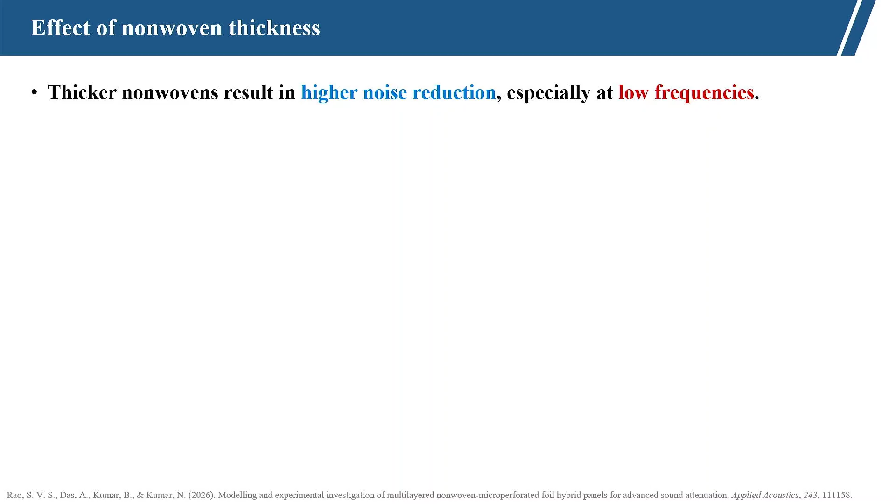So, now we are using nonwoven for protecting from noise pollution. In the last session, we discussed the effect of nonwoven thickness on noise reduction. As the thickness increases, the sound absorption coefficient also increases, and also the noise reduction coefficient.

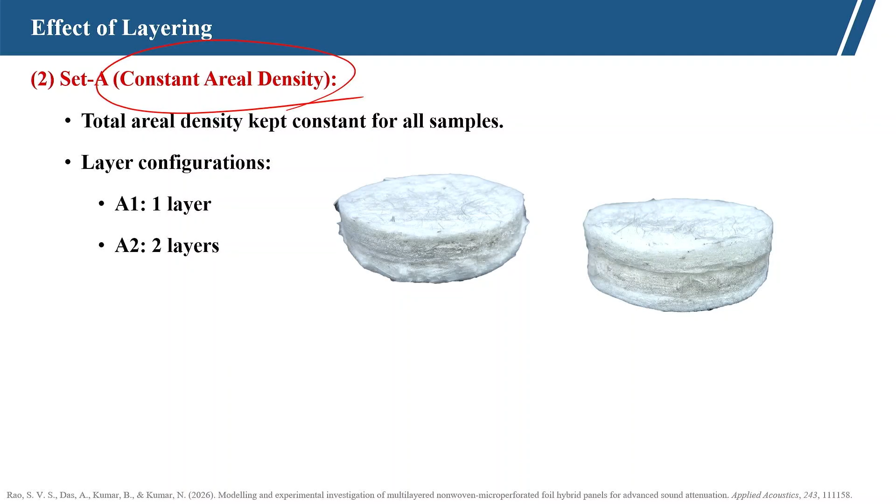Then we discussed a different layering process: 1 layer, 2 layers, 3 layers, 4 layers, 6 layers and 8 layers, keeping the overall thickness constant, and also for different layers where we try to keep the areal density constant. That effect of layering we discussed in the last session.

With the increase in layering, we found that the stacking of different layers increases the sound absorption coefficient. That may be due to the cavity created, where multiple reflection or diffraction is there. These reasons affect the sound absorption.

When sound enters a cavity, it goes through multiple reflection and that decreases the sound energy. On a rough surface, scattering takes place, which disturbs the sound propagation. So, that also helps in sound absorption.

The repeated variations in the material density result in viscous loss, like here the dense material, and then no material in between, the air cavity. So, in the multi-layer, sound comes from this fabric, then the air cavity, and again enters into the nonwoven fabric.

That repeated change in the material results in viscous loss, and this happens more in the case of 8 layers. There are 8 changes in the material density, so that affects the viscous loss.

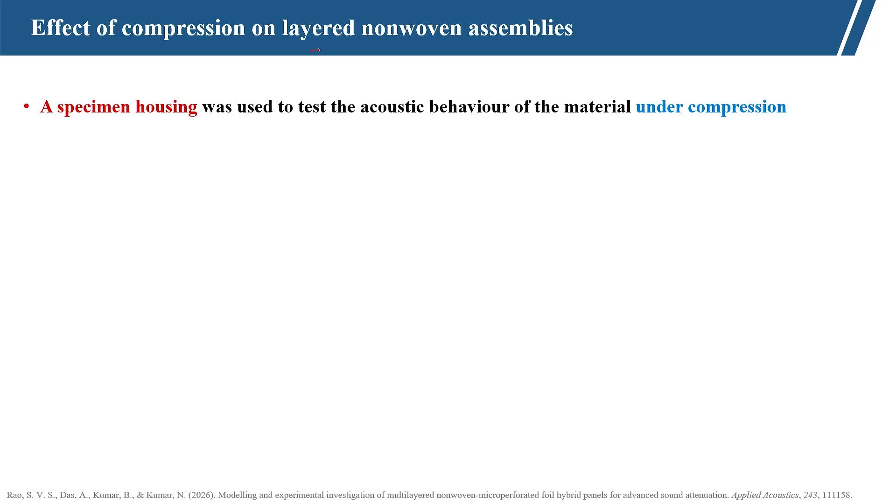Now, we will discuss the effect of compression on layered nonwoven assemblies. We have fabricated a system where the thickness can be changed in a controlled manner. It is not a compression test; we have not put any compressive load, because there the thickness cannot be controlled. With this system, we have controlled the thickness.

There is a screw system. By rotating the screw, we can compress the nonwoven fabric to a certain extent. If we keep the initial total thickness at 40 millimeters, 4 centimeters, and the pitch of the thread is 4 millimeters, then after one complete rotation there will be 4 millimeters of compression, effectively 10% compression. So, by rotating this thread we can compress the material in a controlled fashion.

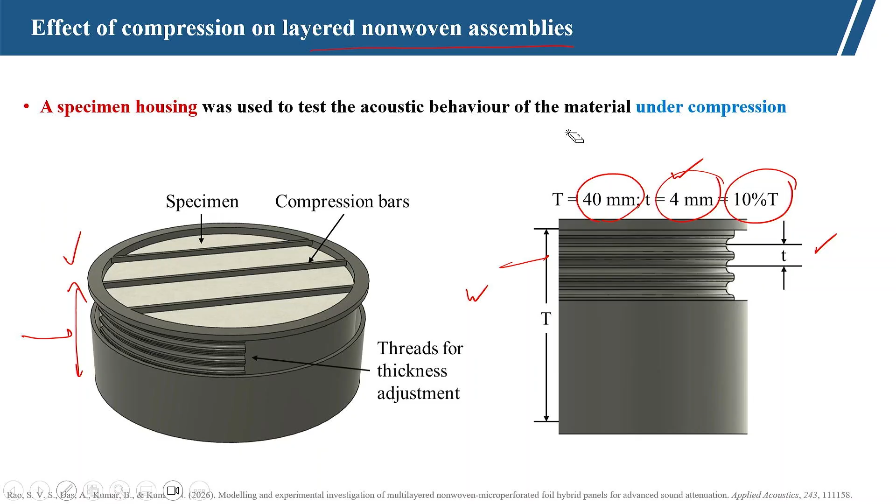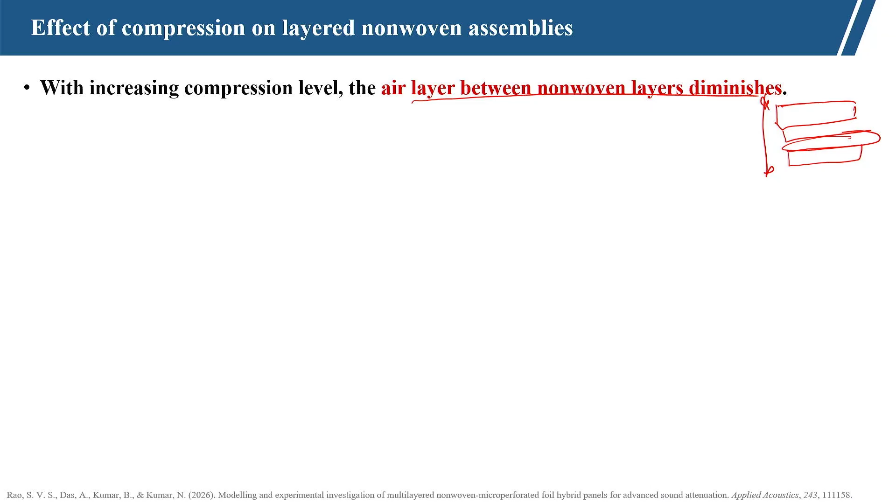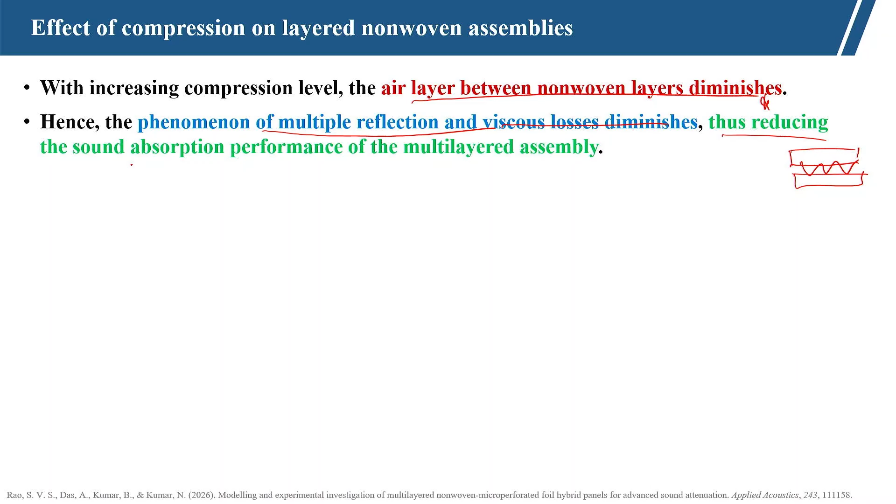With the increase in compression level, the air layer between the nonwoven layers diminishes, because we have used this multi-layer. And the phenomena of multiple reflection and viscous loss also diminish, because the gap between the layers is reducing. The multiple reflection and viscous losses seen in the last study reduce, thus reducing the sound absorption performance of the multi-layer assembly.

In the uncompressed state, the sound absorption coefficient or noise reduction coefficient is maximum, but at 40% compression level, the sound absorption coefficient is minimum. In the multi-layer, the air cavity between layers reduces, and even within a layer the pores and air content reduce.

Next, we prepared a microperforated film. We took a film and created micropores on it, and we observed that the addition of the microperforated film increases the noise reduction coefficient. So, normal film, microperforated film, and normal nonwoven.

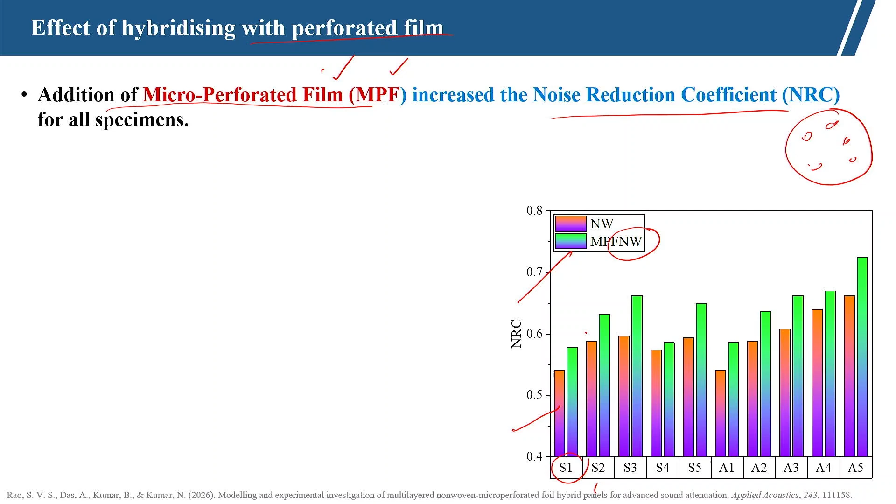The normal nonwoven is S1 and A1; we used the same fabric layers as in our earlier study. S1 is a single nonwoven, one layer, then two layers like that, and with the incorporation of micro-perforated film with the nonwoven, we found the noise reduction coefficient increases.

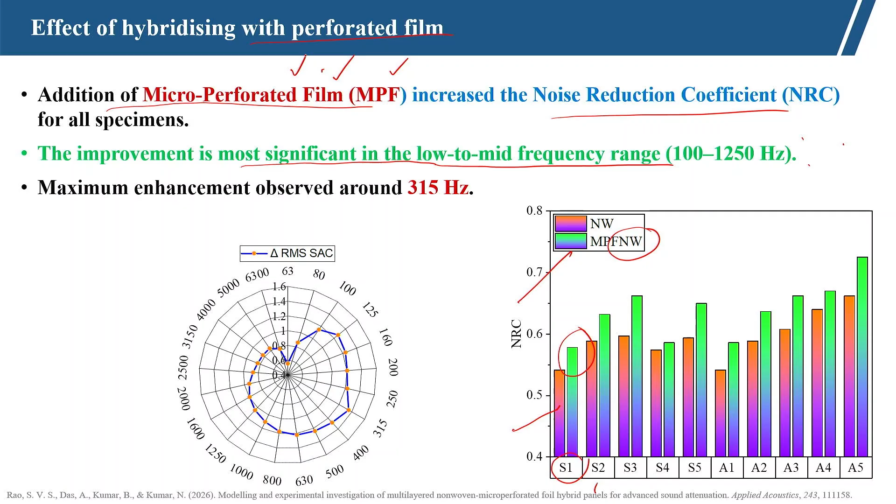The maximum noise reduction coefficient is found around 315 hertz. So, in the low to medium frequency range, the noise reduction coefficient was observed to be highest by incorporating the micro-perforated film along with the nonwoven.

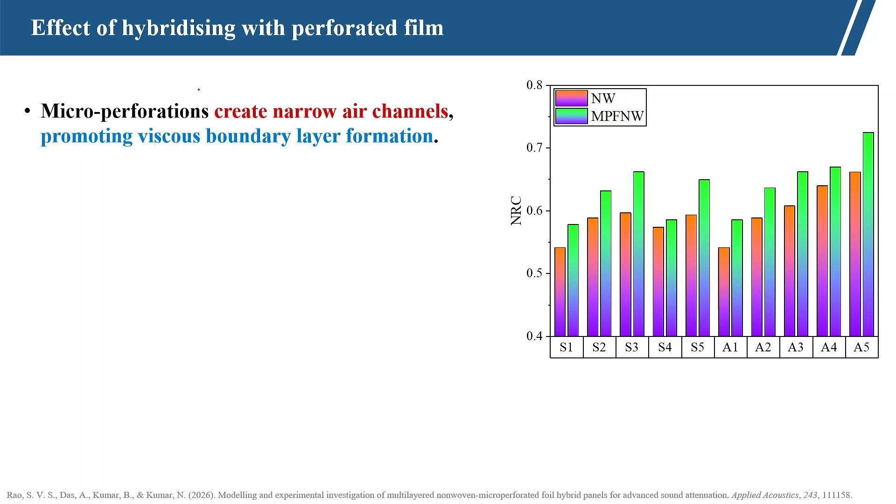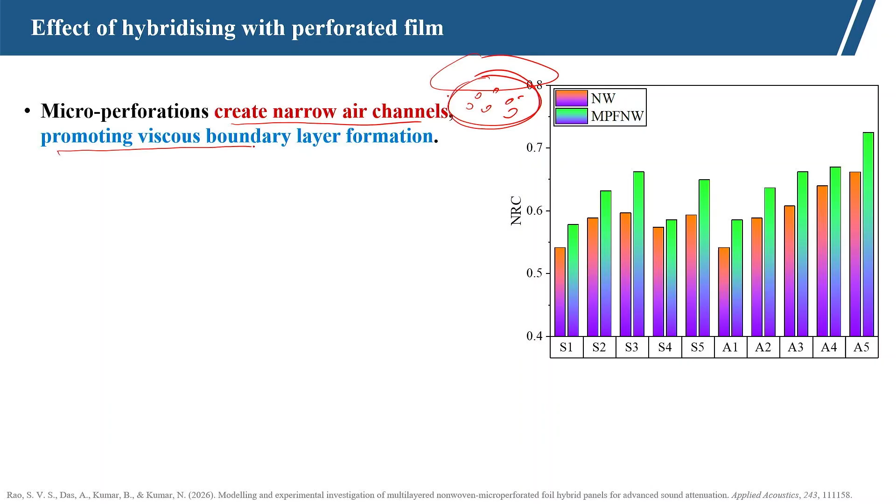So, what happens when we incorporate the microperforated film is that it creates narrow air channels. The nonwoven is there, and after that a narrow air channel will be there, which promotes viscous boundary layer formation, and this leads to greater friction between the fiber or any solid material and air, so the frictional dissipation of acoustic energy will be more.

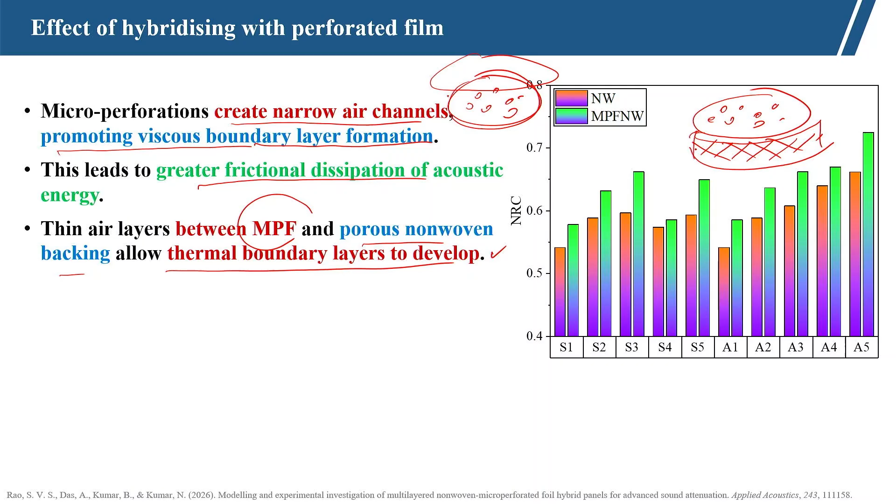The air layer between the microperforated film and porous nonwoven allows a thermal boundary layer to develop. When the microperforated film and the nonwoven are sandwiched, a thin air layer is formed between them, which allows the thermal boundary layer to develop, and the combined viscous and thermal effect enhances the overall sound energy absorption.

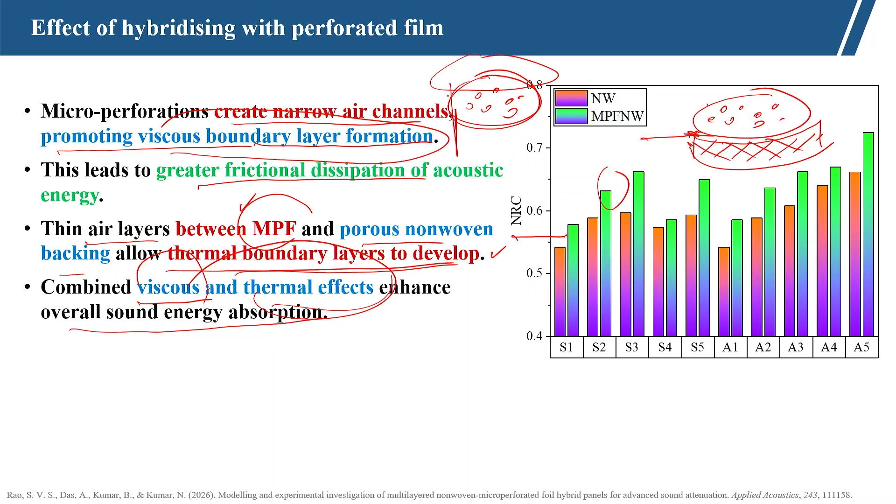So, first the narrow channel creates the viscous layer. Due to the narrow channel, a viscous boundary layer will be formed, and in between there is an air cavity that results in the thermal boundary. Both combined ultimately result in a higher noise reduction coefficient.

The positioning of the microperforated film within the multi-layered structure and the number of microperforated film layers also affect the acoustic behavior. We have seen that incorporating one microperforated film with the nonwoven enhances the noise reduction coefficient, but positioning also affects it significantly. The positioning is of different types. In N1, only one microperforated film is placed; here 8 layers of nonwoven are taken with only a single layer of microperforated film.

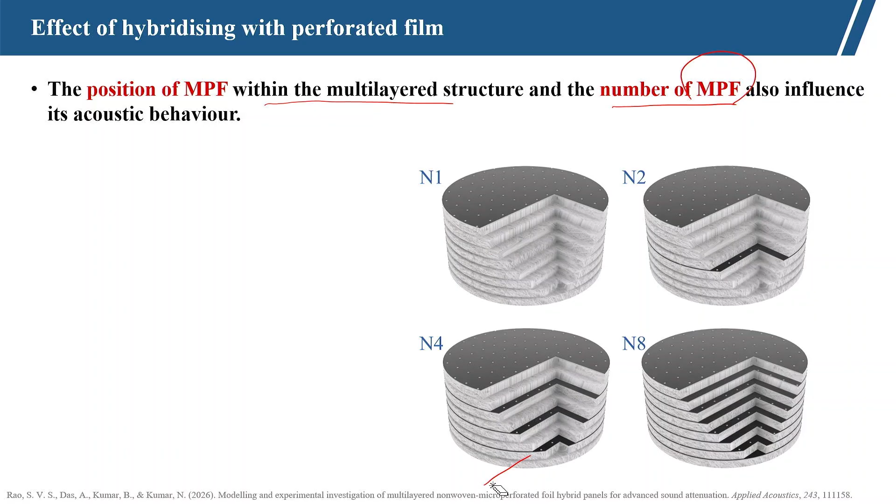In N2 we have kept 2 microperforated films, one at the top and another after the 4th layer. In N4 there are 4, incorporated after every 2 layers, and in N8 we put one alternately after every nonwoven layer. So the number of microperforated films is increasing, and it affects the noise reduction coefficient.

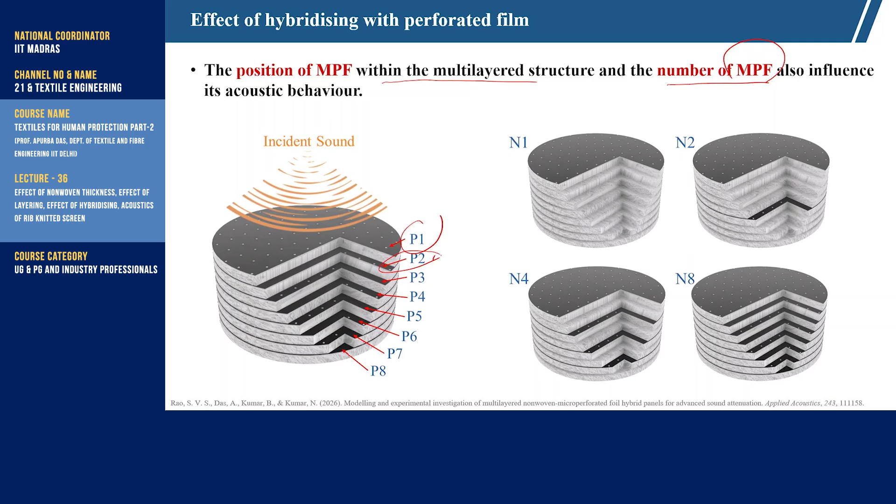Now, incident sound is there. If you see N4, P1, P2, P3, P4 are the perforated films, and when sound is incident, there will be viscous loss and a thermal boundary will be created. In this case we have placed a single layer of microperforated film: P1 when we keep it at the top, P2 a single layer after one layer of nonwoven, and similarly in this way we place the microperforated film.

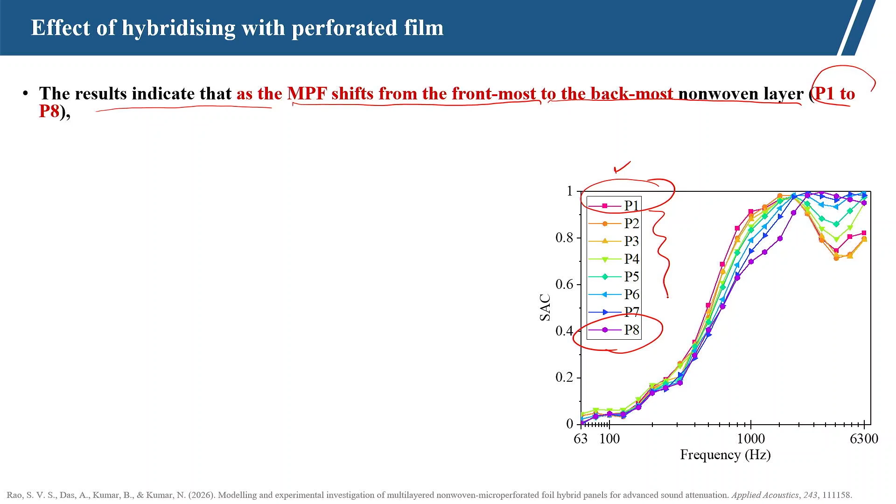The result indicates that as the microperforated film shifts from the frontmost, P1, to the backmost, P8, where P1 means a single microperforated layer at the top and P8 means a single microperforated film just above the bottom layer, the 8th layer, the peak absorption frequency moves towards high frequency.

You can see here this is P8. When we shift from P1 to P8, at high frequency the sound absorption coefficient becomes higher, but at low to mid frequency it is the opposite case; it is decreasing. If we shift the microperforated film from the top to the bottom, the characteristics of the sound absorption coefficient change with the frequency level.

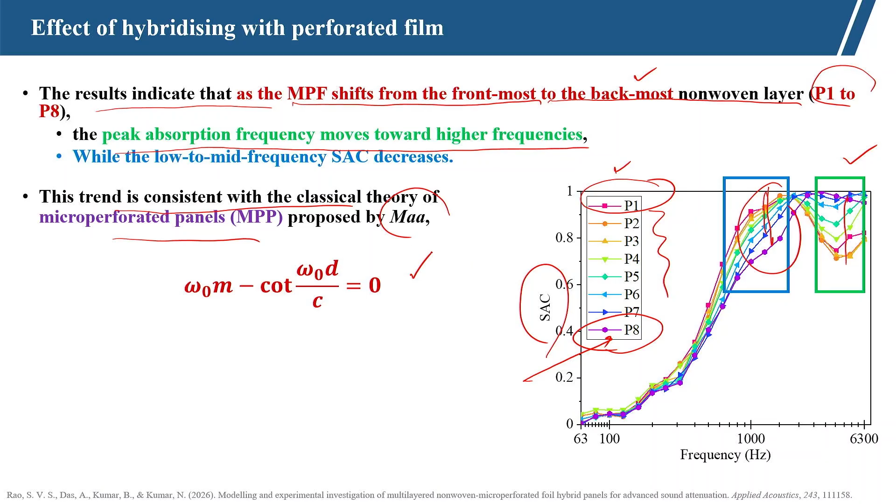As per one published literature, there is the classical theory of the microperforated panel; here we have used a film. According to this theory, omega 0 is the angular resonance frequency, m is the mass reactance of the microperforated panel, in our case a film, and small d is the depth of the air cavity behind the microperforated film. Below the microperforated film there will be an air cavity of depth d, and c is the sound speed.

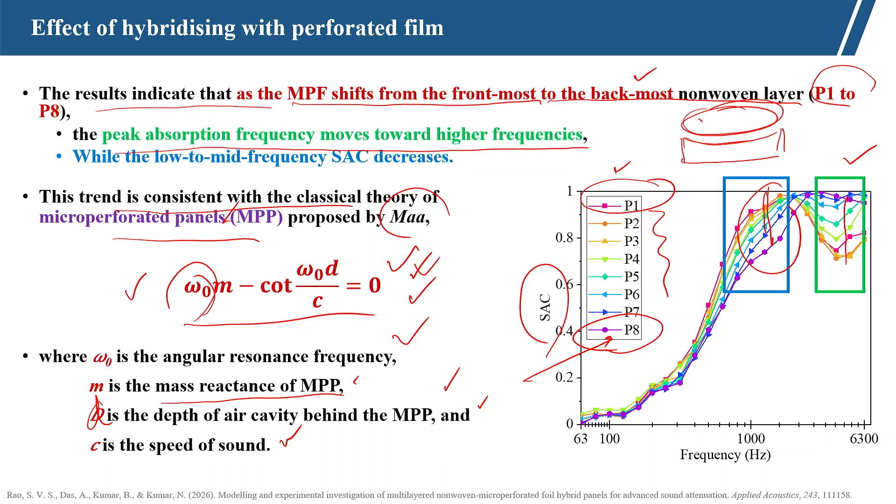These relations hold at different resonance frequencies, and we found that this relation is valid; our present result actually follows this relationship. The angular resonance frequency is inversely related to the depth of the air cavity behind the microperforated panel in a nonlinear manner.

As d decreases, omega 0, the angular resonance frequency, increases to satisfy the equation, hence the peak shifts towards the higher frequency region. Thus, the positioning of the microperforated film in a multilayered configuration satisfies the equation.

The frontmost microperforated film allows greater effective air cavity behind it, enhancing the sound absorption coefficient at low frequency. Whereas, at the back position it reduces the cavity because of the effective mass of the top layer. So, air cavity volume decreases, increases viscothermal damping, shifting the peak of absorption to the higher frequency. So, we have seen that our experimental data follows the proposed theory.

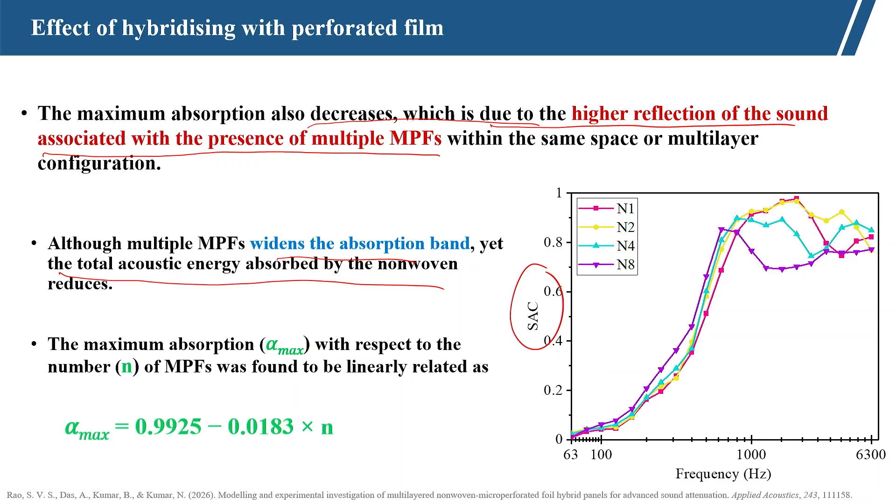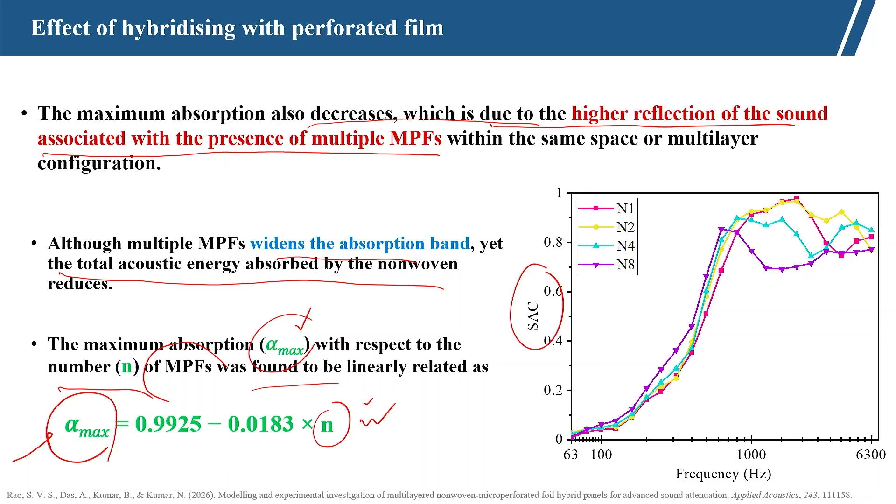Now, we can get the relationship here. For maximum absorption alpha max with respect to the number of layers of microperforated film, we get a linear relationship. So, if we need a certain value of maximum sound absorption, then using this empirical relationship we can calculate the number of microperforated film required.

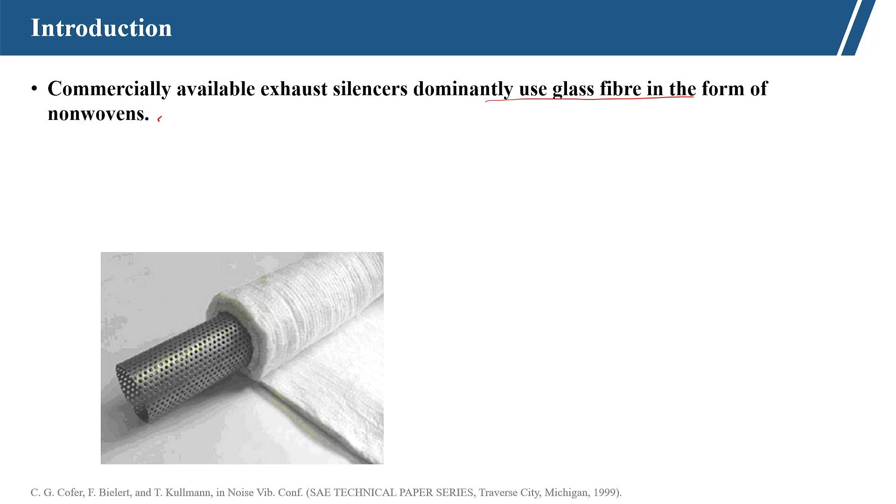Now, we will discuss the acoustics of rib knitted screens. This is commercially very important in the automotive silencer exhaust, which is dominated by glass fiber in the form of nonwoven, and the problem is that due to vibration at the exhaust, the glass fiber gets split, shredding takes place, and glass fiber comes out and mixes with the environment through the exhaust. So, glass filled silencers blow glass fiber dust out during application, mainly governed by the vibration and hot air flow in the silencer duct.

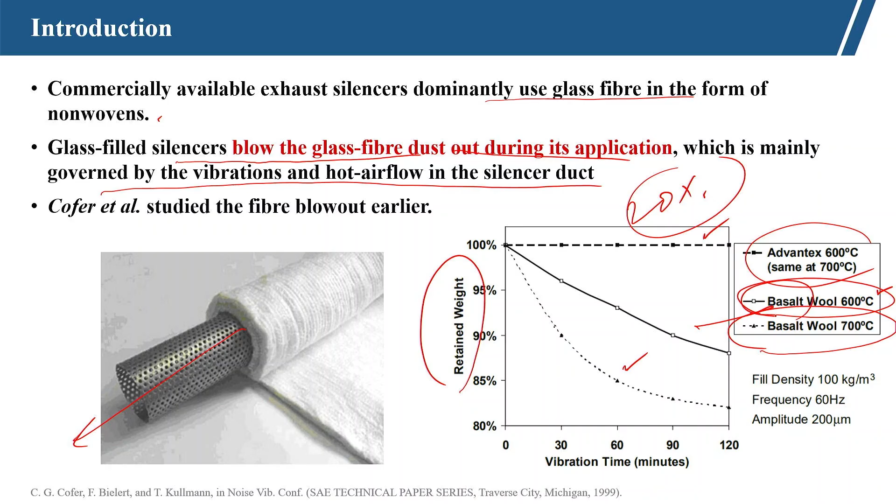There was a study of retained weight. For the standard material there is no loss, but with basalt wool at 600 degree Celsius and at 700 degree Celsius, there was a significant reduction in mass. That means at higher temperature the reduction rate is very high. It can go to around 80% weight, meaning around 20% loss in fiber, due to small fiber particles coming out from vibration. This increases health issues by releasing micro glass fiber dust in the air.

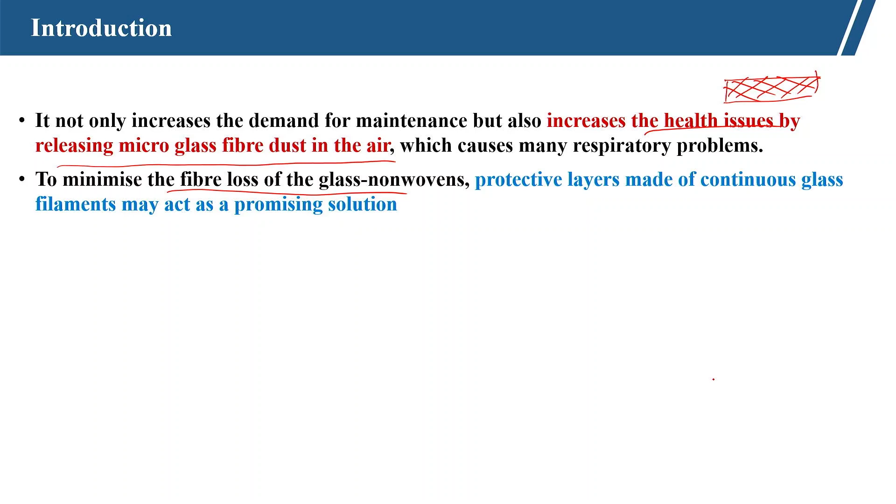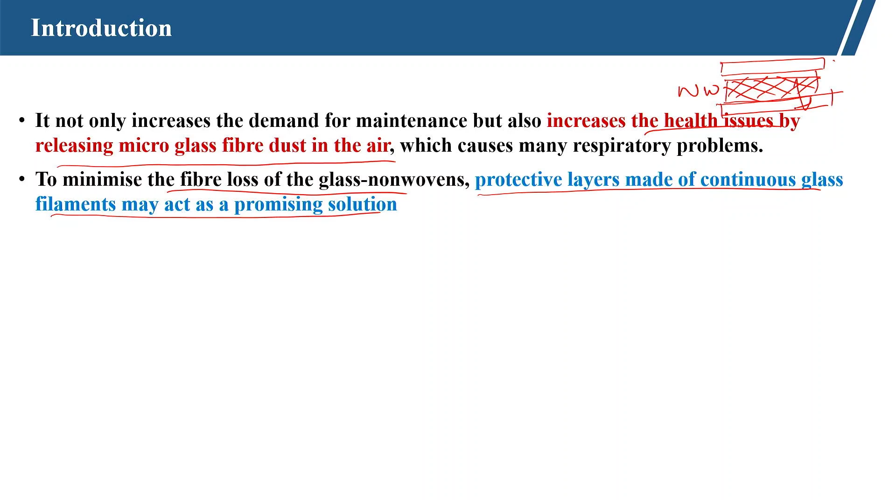To minimize this loss from the glass nonwoven, we need a protective layer. Glass nonwoven is very commonly used for high temperature filtration and acoustics. So, if we sandwich the glass nonwoven between knitted fabric layers, a continuous protective layer made of continuous glass filament may reduce the glass fiber dust release. So, that was our basic objective.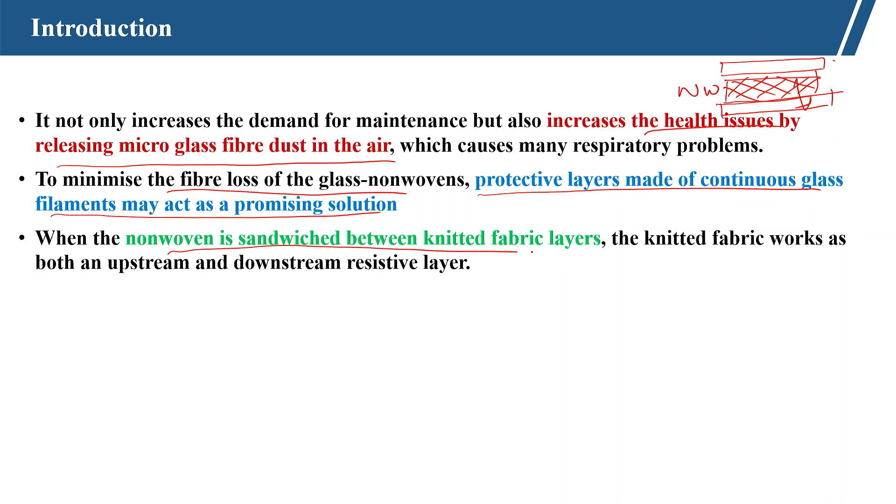So, nonwoven is sandwiched between the knitted layers. A knitted fabric works as both an upstream and downstream resistive layer. In addition, the knitted fabric will enhance the sound absorption coefficient. So, in our study we have examined both the fiber dust release characteristics and the sound absorption characteristics.

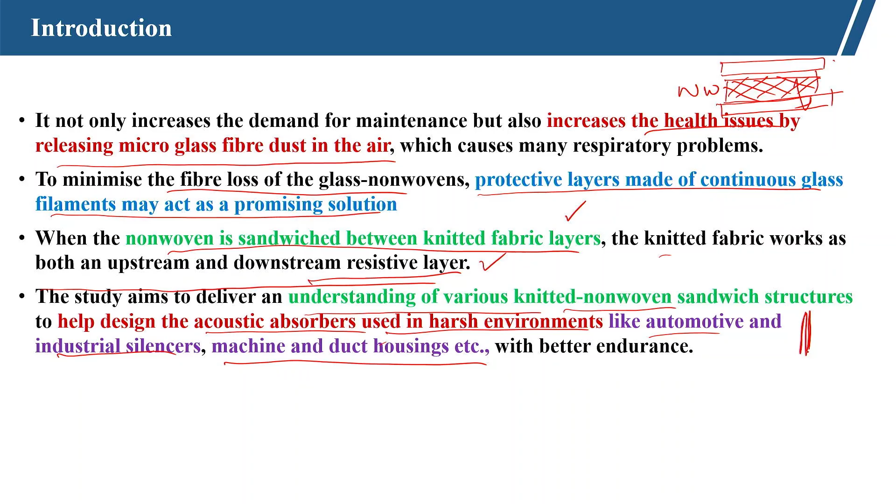The aim of this study is to deliver an understanding of various knitted nonwoven sandwich structures on acoustic absorption characteristics in harsh environments, like high temperature and high vibration, which occur in automotive or industrial silencers, machine or duct housing. In most of these applications we use glass fiber because it is cheap and has high temperature resistance. So, you can see the role of knitted structure.

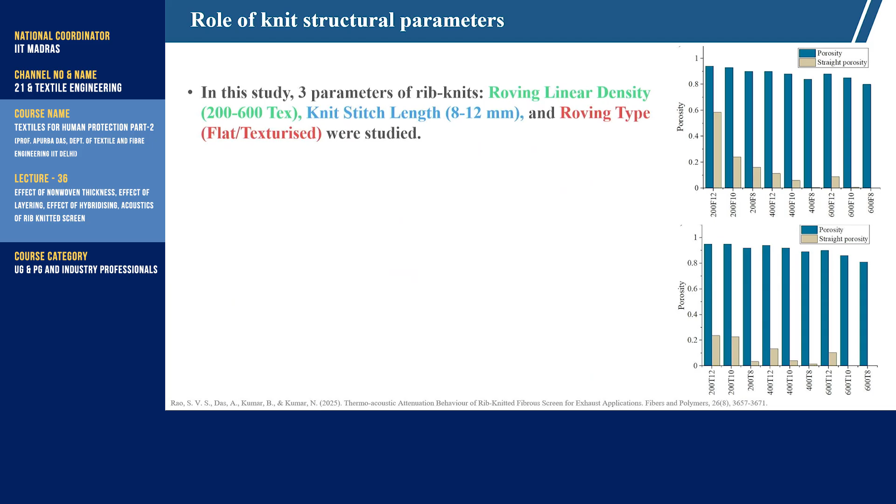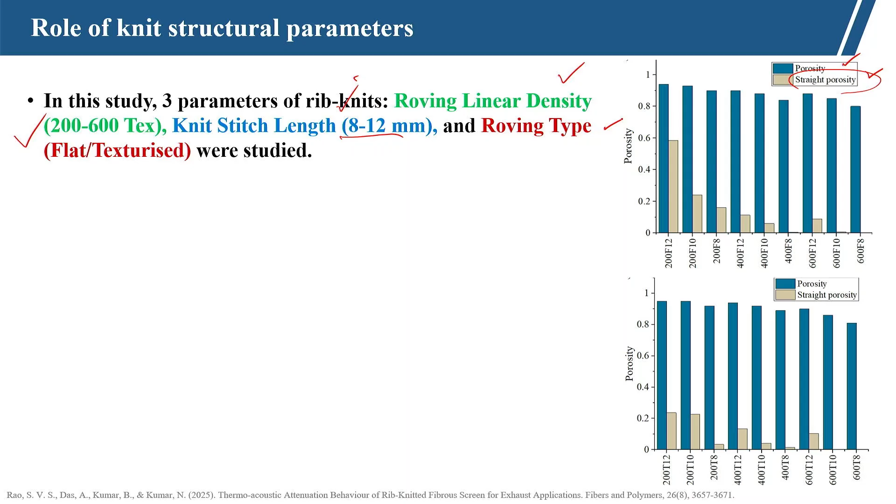So, here is the porosity and straight pore. Straight porosity we have measured. In this study, 3 parameters of rib knitted structures were considered, that is roving linear density, which is kept 200 to 600 tex, knit stitch length 8 to 12 millimeter, and roving type, flat and textured. So, 2 different types of roving also we have used.

All these parameters were selected because they are directly affecting the pore characteristics of the material. If we change the roving tex, keeping all other parameters constant, that will affect the pore structure, even stitch length. And roving type: flat roving will create the straight pore, and textured roving will create the tortuous pore. Tortuous pore is important, as we have discussed earlier, if we can create the tortuous pore, then the sound absorption will be high. So, we have selected our experimental parameters.

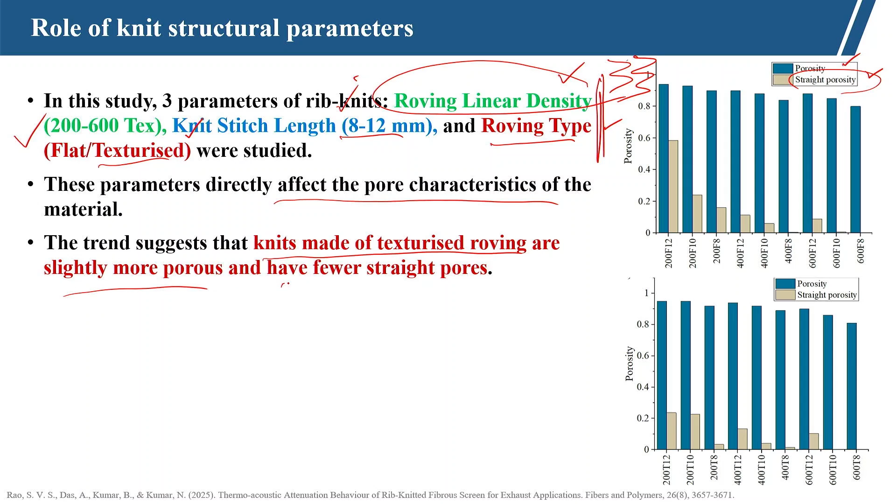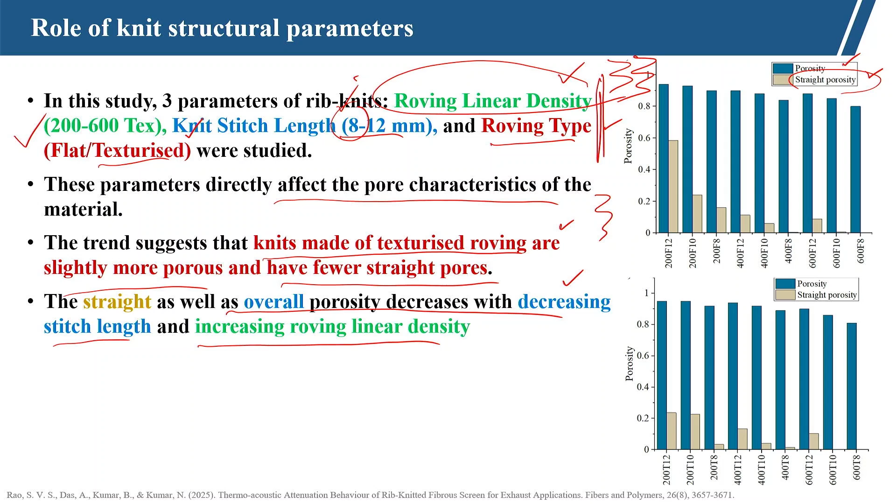The trend suggested that knits made of textured roving are slightly more porous and have fewer straight pores. So, this will create the tortuous pore. The straight as well as overall porosity decreases with decreasing the stitch length; at lower stitch length the porosity will be low. Also with the increase in roving linear density, keeping all other parameters constant, the fabric will be compact and the porosity will be low.

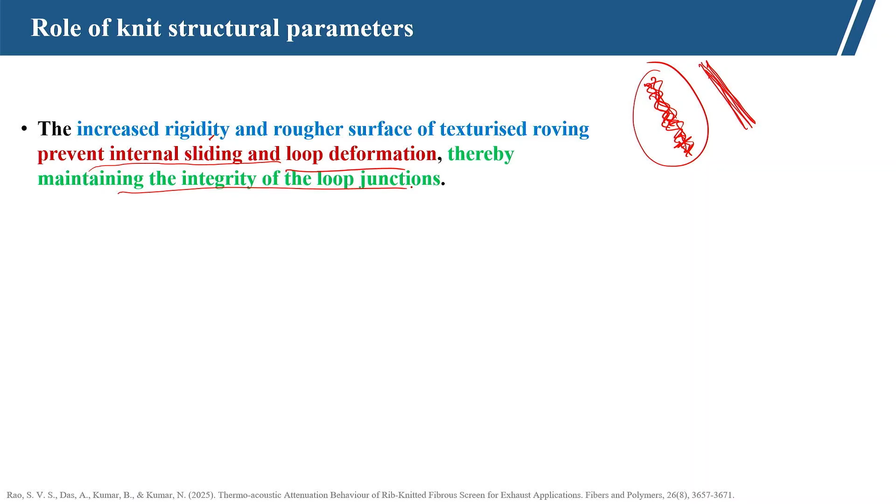The increased rigidity and rough surface of textured roving prevents internal sliding. This is a textured structure and flat filament. In flat filament there is a chance of internal sliding between the threads, but in textured there will be proper locking. So, internal sliding will be less and loop deformation will be reduced, thereby maintaining the integrity of the fiber loop junction. So, in case of textured we will get the stable loop structure. Loop pores remain large, there will not be any shift.

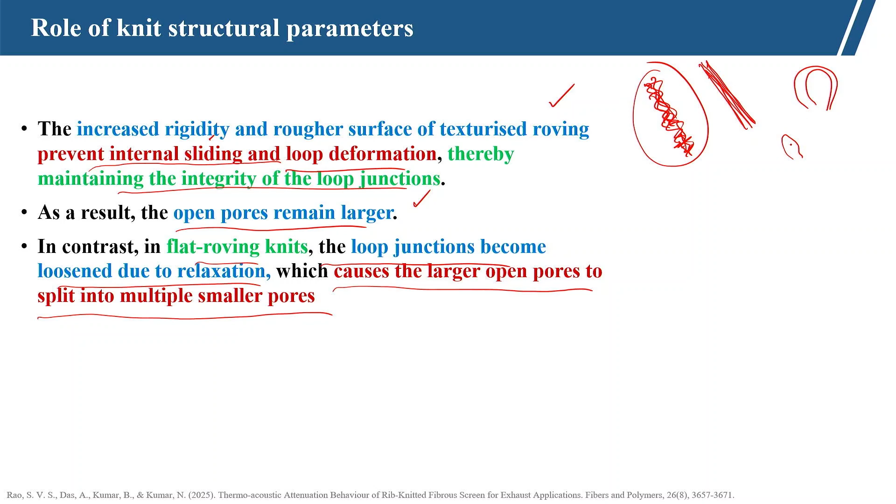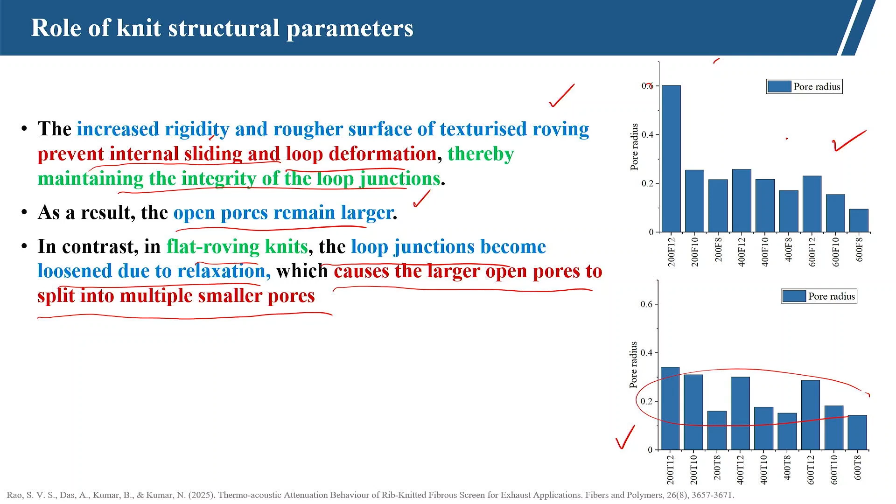In contrast, in flat roving knit the loop junction becomes loosened due to relaxation, which causes the large open pores to split into multiple smaller pores, because the fibers get split. So, one large open pore will be split and multiple small pores can be there, because these fibers are not locked. Here we can see this is textured and this one is flat. In textured, the pore structures are almost uniform, but here we have got the splitting of the pores.

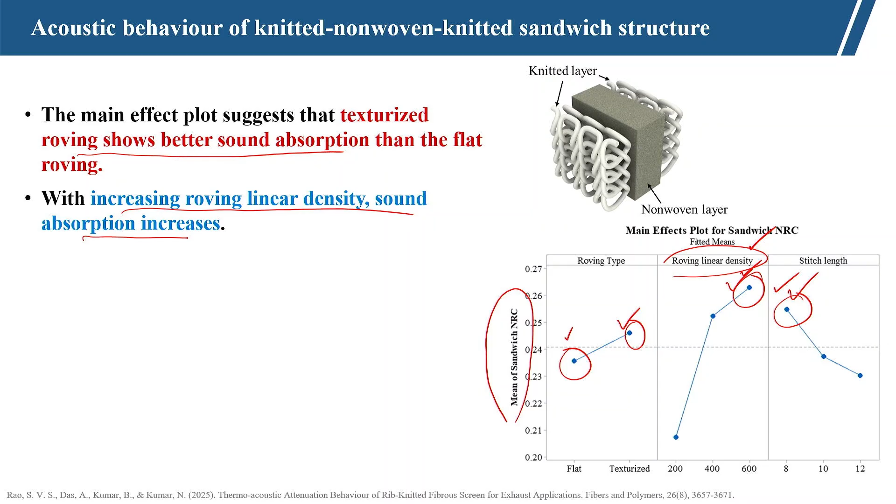So, textured roving shows better sound absorption. With the increase in linear density, sound absorption increases. Here you can see between 200 to 400 tex, the rate of increase is higher as compared to 400 to 600 tex, and a similar trend is there, although in a negative sense, when we increase the stitch length: from 8 to 10 there is a higher reduction in noise reduction coefficient, and from 10 to 12 there is further reduction.

Now, let us see the type of pores. These are the straight pores; from the flat yarn we will get maximum straight pores, and for textured filament there will be a mixture of straight pores covered by fibers plus tortuous pores. Considering the knitted fabrics as a perforated plate, earlier we have used the perforated film, you can consider knitted fabric as a perforated plate with cylindrical holes normal to the surface backed by nonwoven.

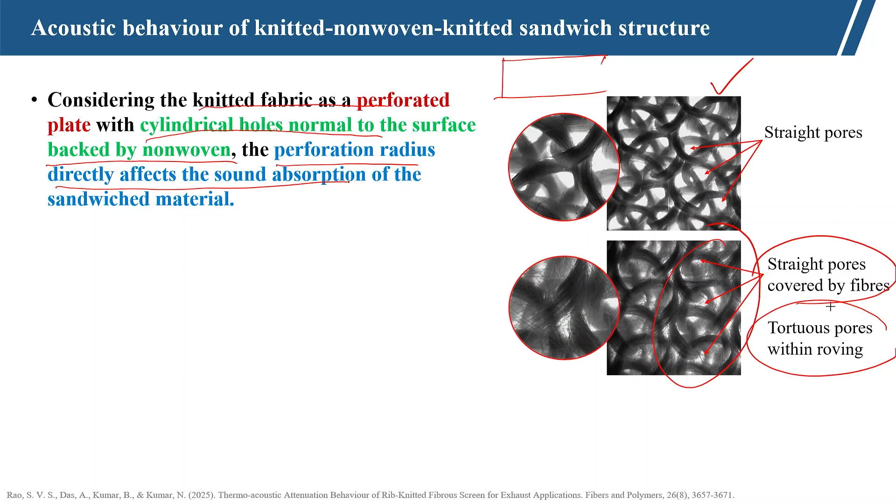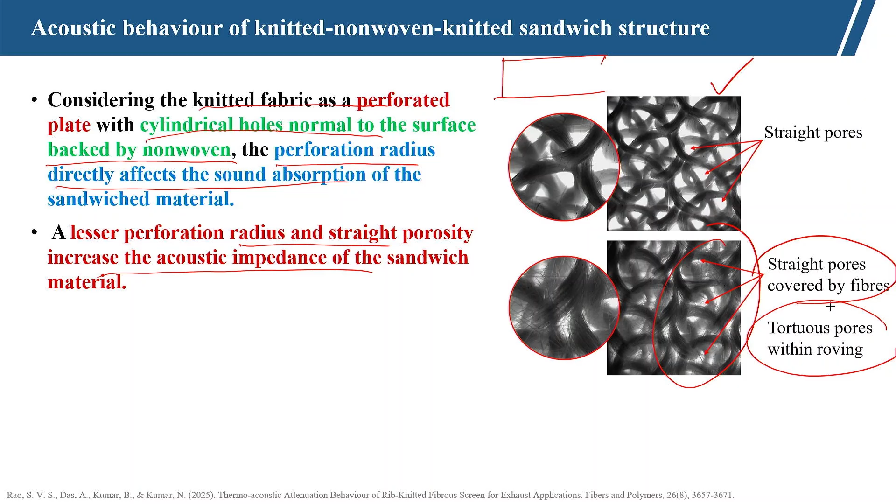The perforation radius directly affects the sound absorption of the sandwiched material. Lesser perforation radius and straight porosity increase the acoustic impedance of the sandwiched material. A too small perforation radius and straight pores will hinder the absorption as well. If the pores are too small, the losses in the viscous boundary layer of the straight pore will reduce.

Texturing enhances the sound absorption of the material by imparting fibers in the straight pores. In the straight pore we are imparting other fibers and making the pore tortuous, from straight to tortuous pores, and that enhances the sound absorption coefficient in case of textured roving, and creating perforation in the compactly bound fibers inside the roving. In flat there are compactly bound fibers, and when we texture we are creating the pores.

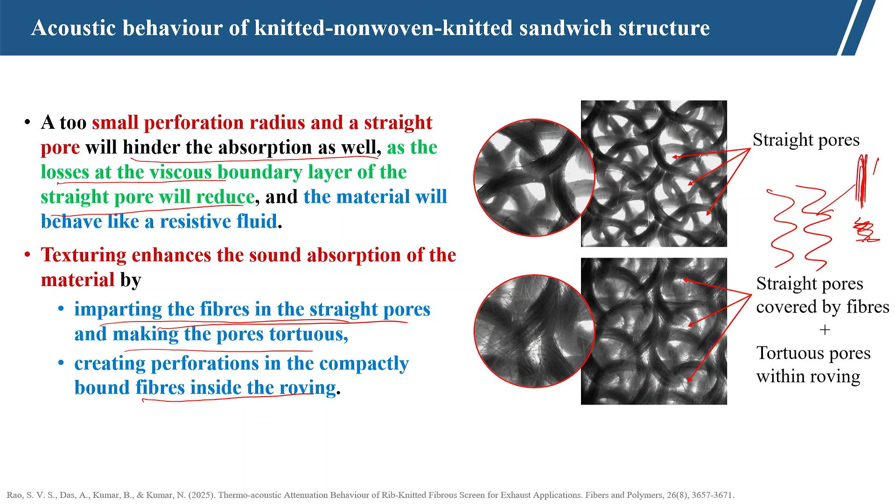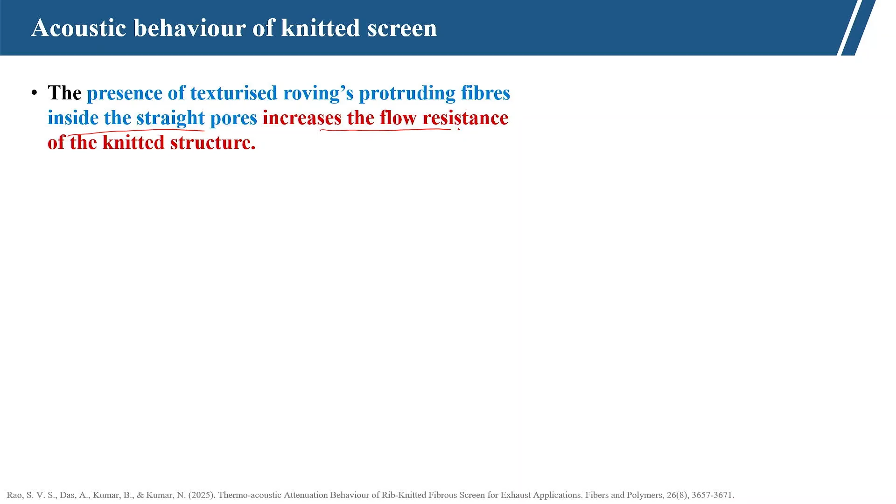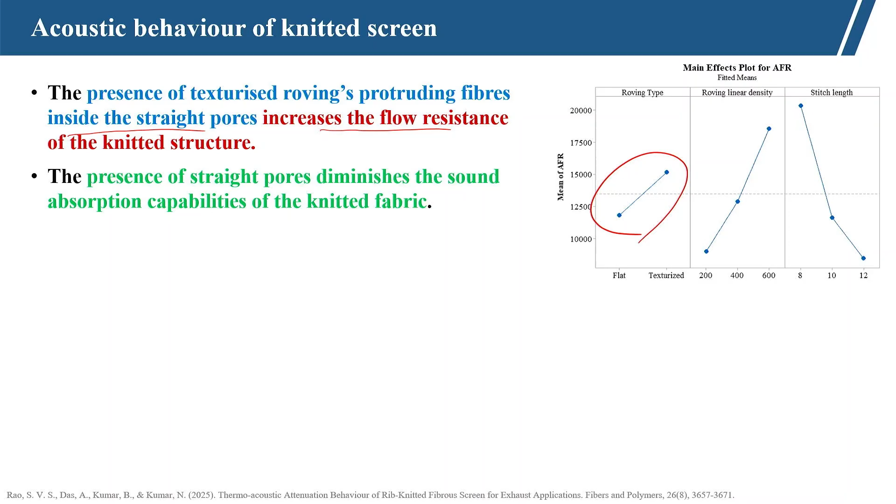The presence of textured roving's protruding fibers inside the straight pores, increasing the flow resistance of the knitted structure. So, that we have already discussed. So, presence of straight pores diminishes the sound absorption capability of the knitted fabric. With straight pores, the sound absorption capacity will be lower. So, here air flow resistance also is showing the similar trend.

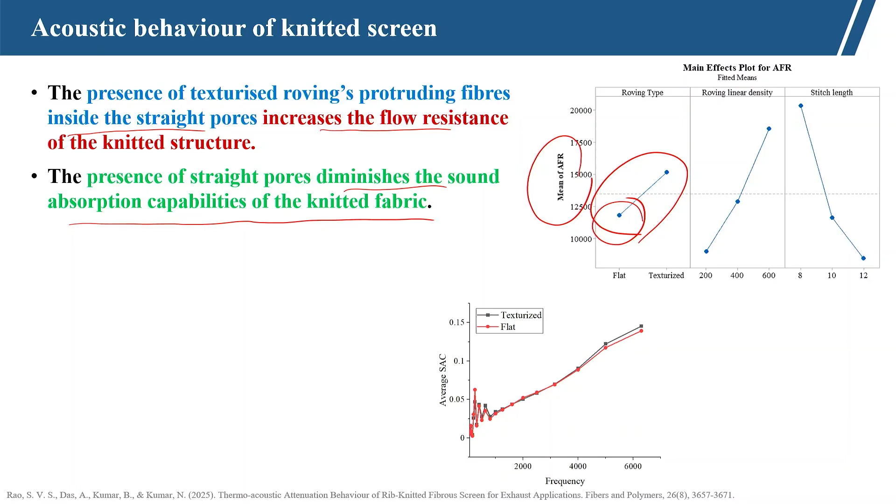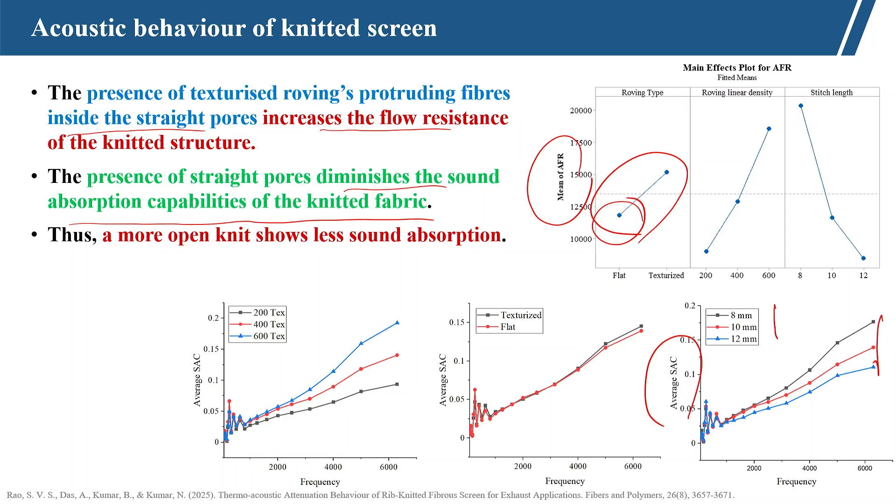So, that we have already discussed. With the increase in stitch length, the average sound absorption coefficient reduces, and also with the increase in tex, the sound absorption coefficient increases.

Now, we try to assess the vibration fiber loss. Due to vibration there will be fiber loss. The vibration loss of fiber in the nonwoven has been an issue worth addressing. As we have discussed, that is a very important issue. So, fiber loss of the knitted-nonwoven-knitted sandwich structure was compared with the nonwoven alone. For that, a new instrument has been developed to assess the vibration loss.

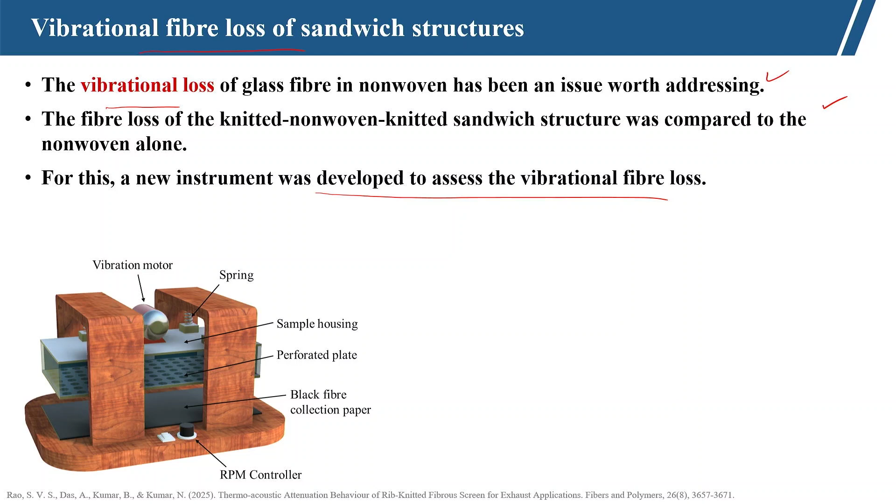This instrument is placed on a vibrating motor. The vibrating motor generates the required vibration by controlling the RPM, and then there is the sample housing. We can place the sample, and whatever dust is generated during the vibration falls through the perforated plate onto the fiber collection paper at the bottom, where the fiber gets collected.

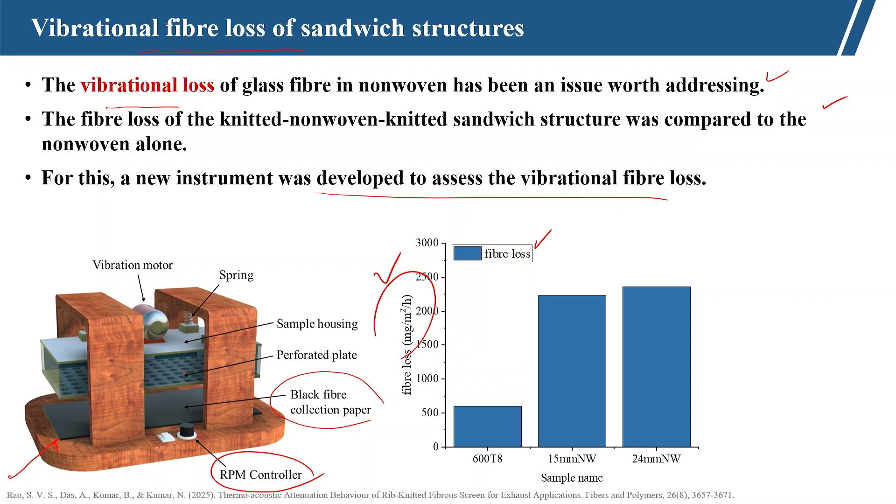So, fiber loss was measured at different levels. This is the fiber loss in milligram per square meter per hour. These are the sandwich fabric, 15 millimeter nonwoven and 24 millimeter nonwoven. We measured this fiber loss. When the sandwich fabric is there, we found that fiber loss is very low, and without sandwich there is a fiber loss.

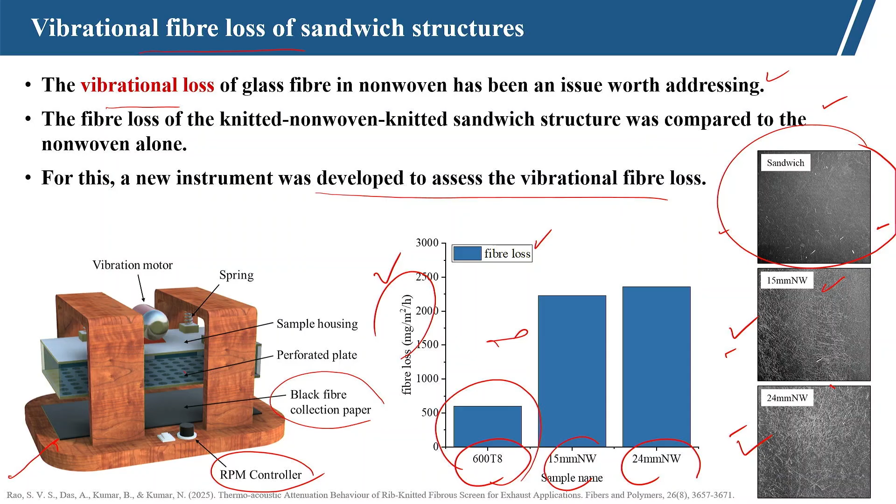These are only nonwoven fabrics, and this is the sandwich fabric, and due to the presence of the knitted structure, it prevents the fiber loss. Fiber loss reduces to a greater extent. Now, we can see the video of this instrument. This is running, and we can very well see that there is a fiber loss.

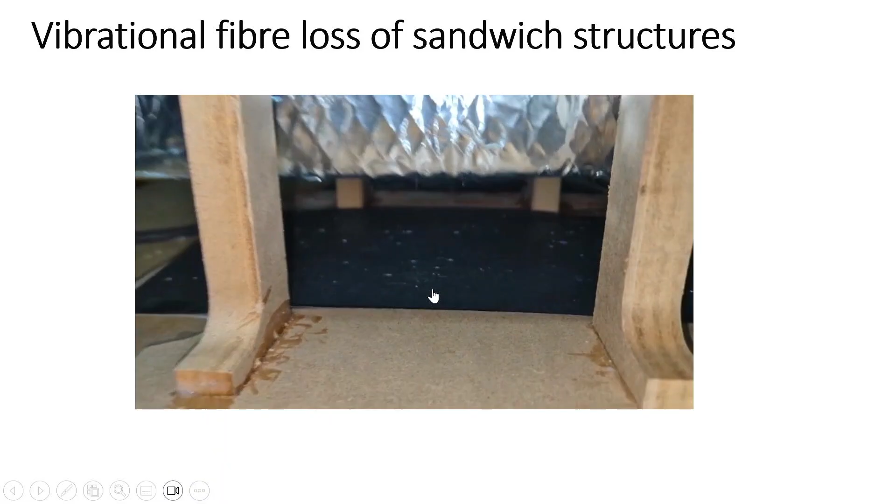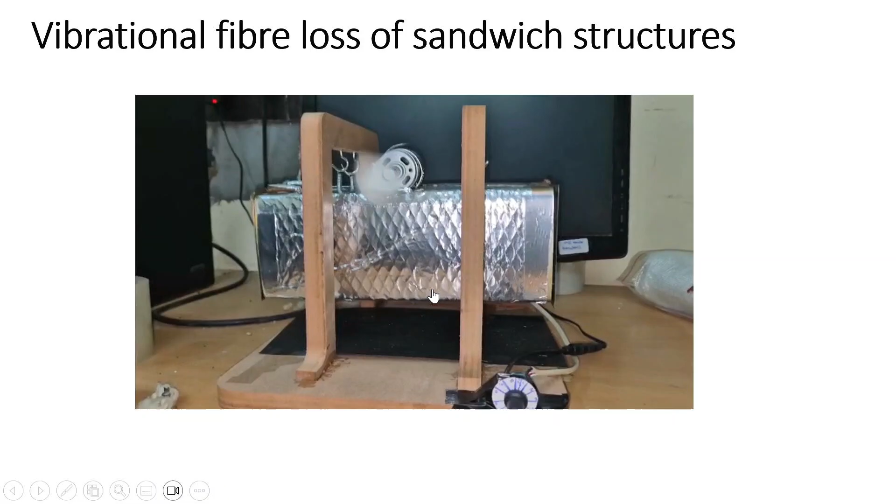The fibers are collected due to the vibration, and this glass fiber dust actually goes along with the exhaust and ultimately goes with the air. So, it is polluting the air. For that, we found that if we sandwich the nonwoven with the knitted fabric, that gives better protection, and also the insulation and sound absorption characteristics increase. Now, you can see very well that there is dust.

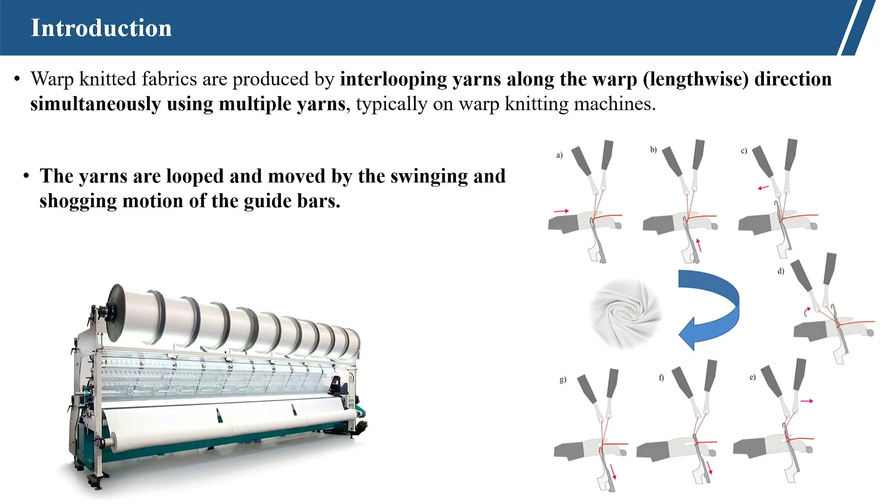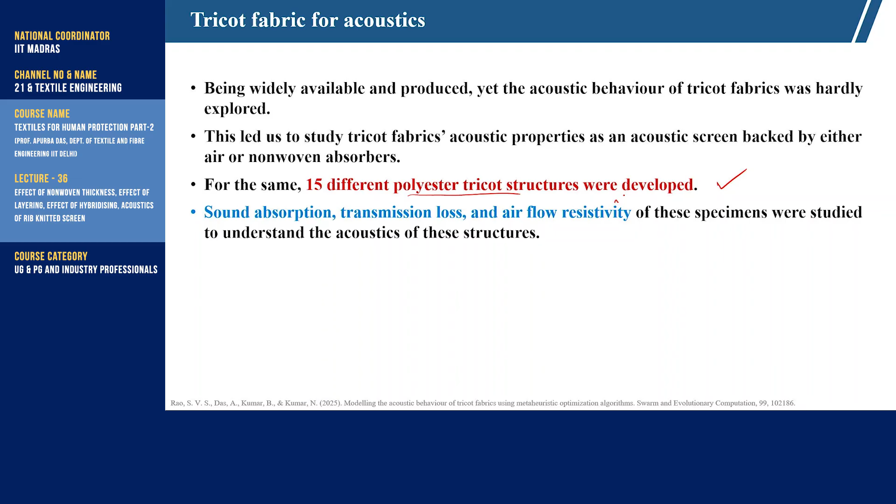Now, acoustic characteristics of warp knitted screen. We have produced warp knitted structures with different looping patterns. Fifteen different types of fabrics were produced, polyester tricot structures were developed, and sound absorption, transmission and air flow resistivity were studied.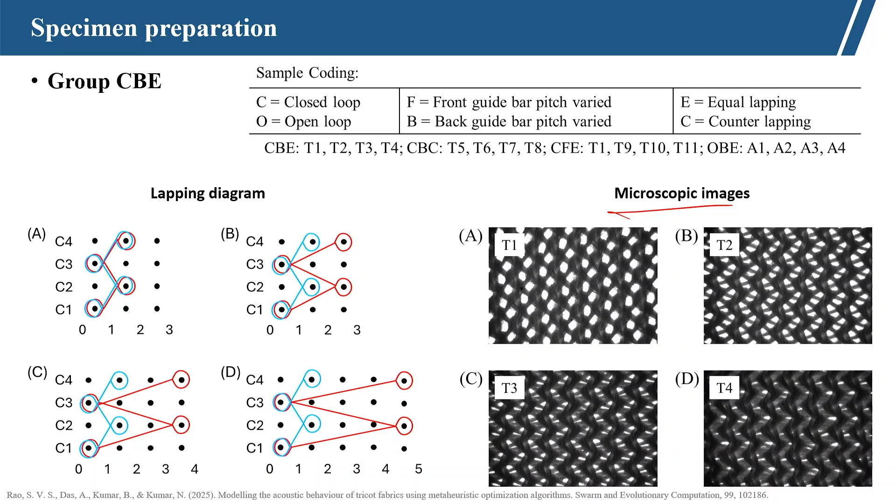Now, we can see the sample coding, group CBE coding. This is the lapping diagram, and here are the microscopic images of the fabric. CBE means C is closed loop, B is the back guide bar pitch variation, and E is the equal lapping. CBC is closed loop, back guide bar pitch varied, and C is counter lapping. Similarly, we have produced the CFE and OBE.

CBE is grouped as T1 to T4, CBC T5 to T8, CFE effectively T1, T9, T10, T11, and OBE is A1, A2, A3, A4. So, these are basically the coding. T1, T2, T3, T4 is the CBE type of combination, that means closed loop, back guide bar pitch variation and equal lapping.

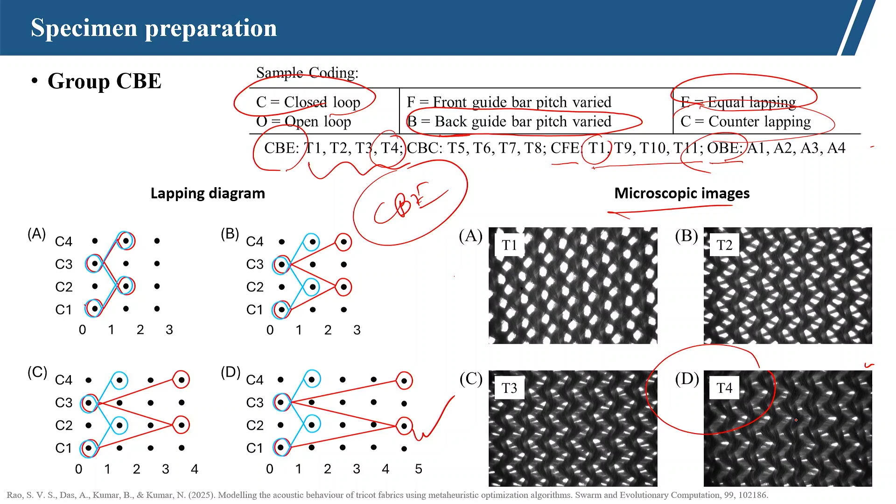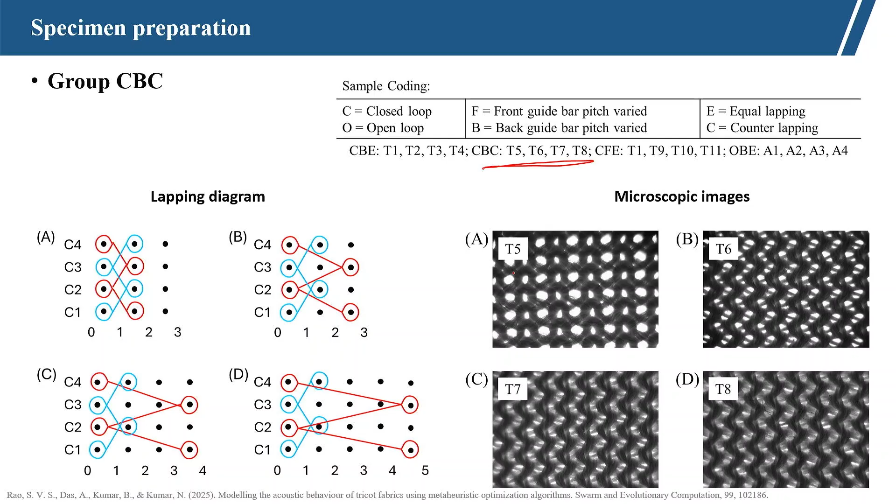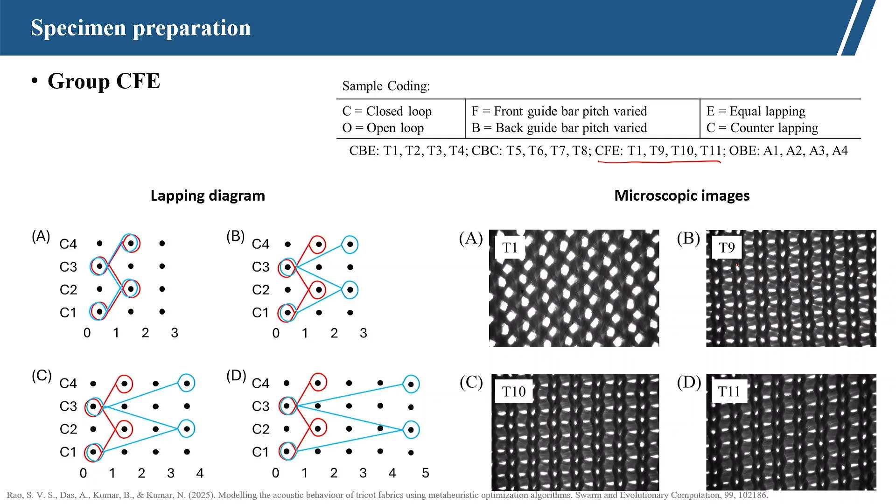From there we can see A, B, C, D, these are the variations of the looping, and accordingly we can see the microscopic image where T4, that is D, with this structure we get the maximum covering. Similarly, we have developed other structures. Here this is the lapping pattern CBC, giving T5, T6, T7, T8, then CFE, T1, T9, T10 and T11, and OBE, A1, A2, A3, A4. Accordingly the lapping diagrams are there.

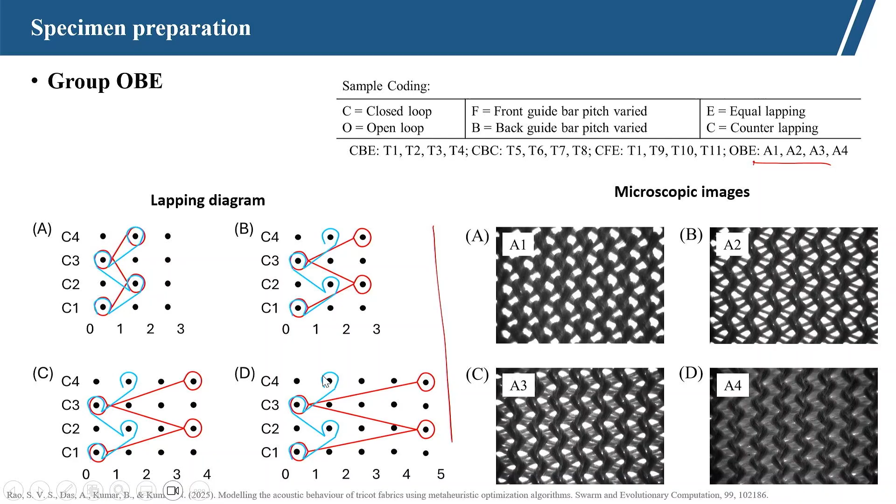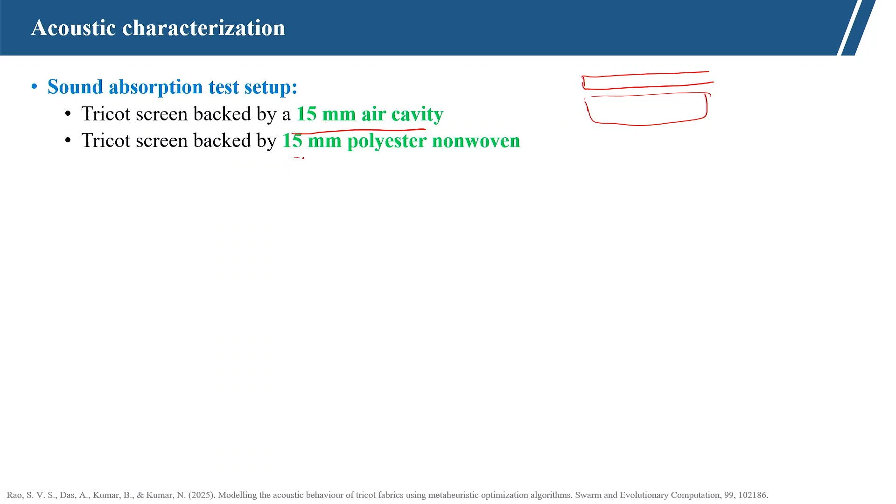Then we studied the sound absorption coefficient. In the sound absorption setup, the tricot is backed by a 15 millimeter air cavity. In another case, the tricot screen is backed by 15 millimeter polyester nonwoven. Two sets we have produced, and tested as per the ISO standard.

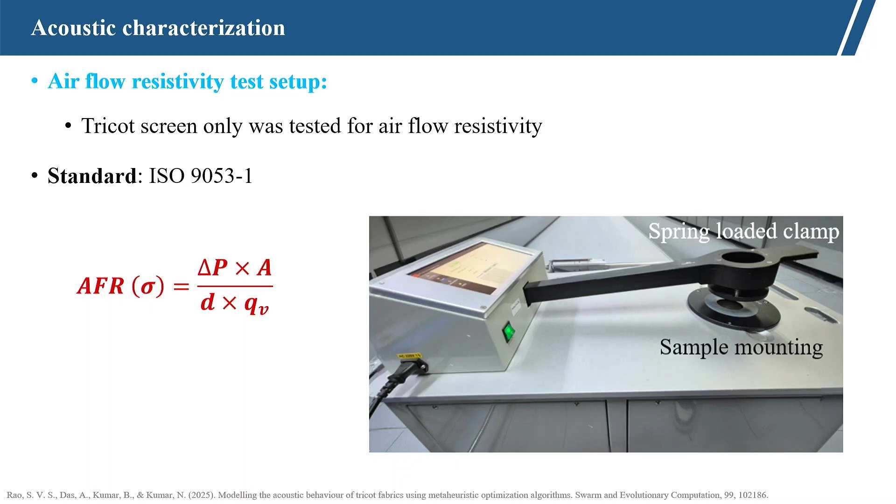air and nonwoven respectively. When we measure the tricot sound transmission characteristics, the microphones are on both sides, where we measure the sound energy before entering the fabric and after entering, and there is an anechoic termination where sound will get absorbed, so there will not be any reflection. Air flow resistivity was tested by an air permeability tester as per ISO 9053-1 air flow resistivity.

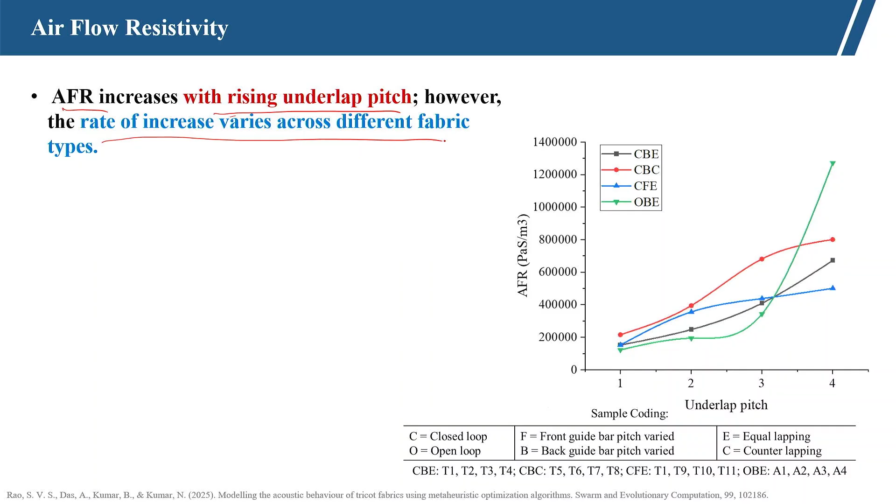Now, try to see here the trend. Air flow resistivity increases with rising underlap pitch. However, the rate of increase varies across the different fabrics. So, if we increase the underlap pitch, the air flow resistivity increases. Air backing and nonwoven backing: here this is nonwoven backing, here we have the air backing system. If we compare these two, in both configurations the noise reduction behavior follows a similar increasing pattern with the increase in underlap pitch.

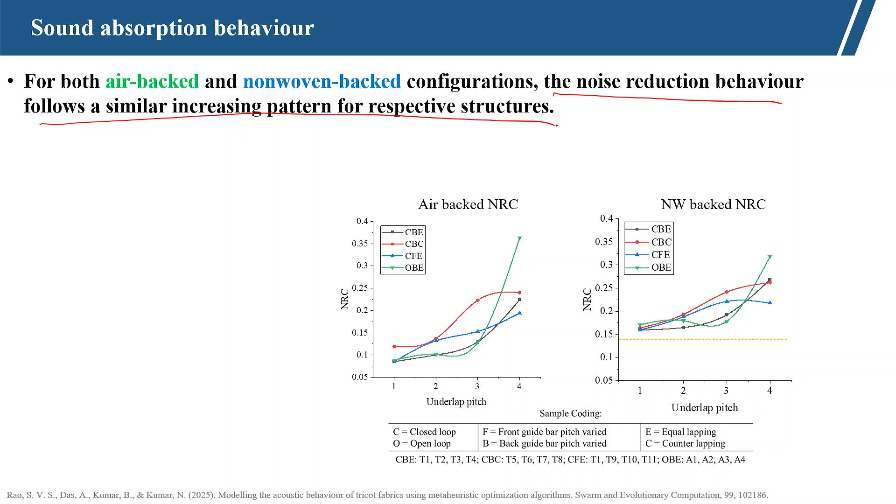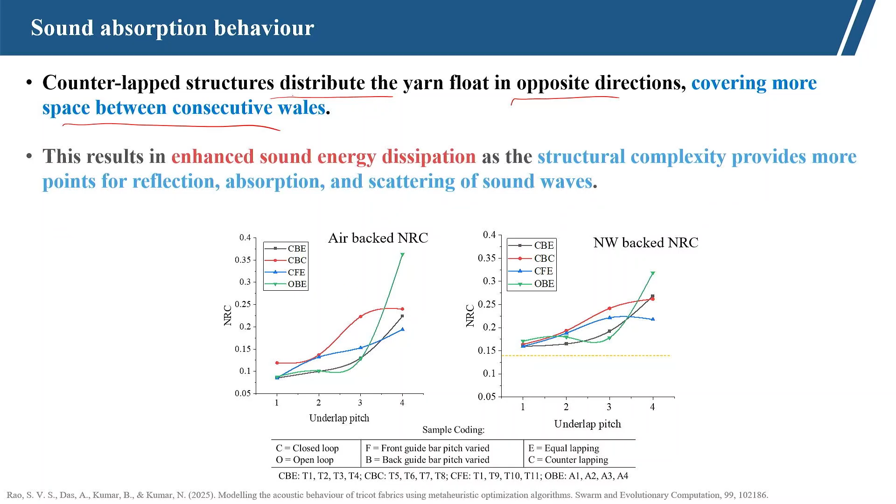The counter lapped structure shows higher energy compared to other structures. Here this is a counter lap. These structures distribute the yarn float in opposite directions, covering more space in between the consecutive wales, so higher resistance will be there. This results in enhanced sound energy dissipation, as the structural complexity provides points of reflection, absorption and scattering of sound. So, the pore structures become complex when we use the counter lapped structure.

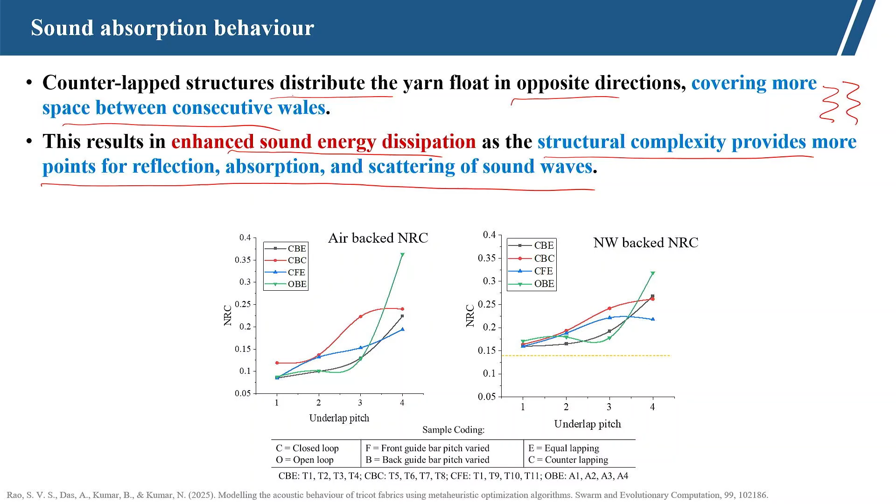The rise in noise reduction coefficient is exponential in the open loop structure. If you see the open loop structure, it exponentially increases with the increase in underlap pitch. As the underlap pitch of the open loop structure increases, the inter yarn gaps reduce significantly, which results in a greater noise reduction coefficient. This leads to improved impedance matching between the air and the fabric, facilitating better sound absorption.

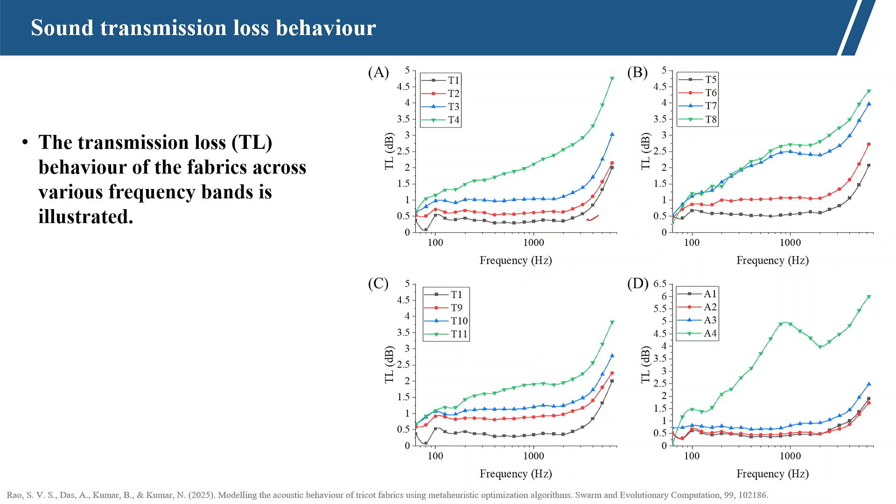Now, sound transmission loss: if we see the transmission loss behavior of the fabric across the various bands, here T1 has the lowest sound transmission loss and T4 is higher. To compare the transmission loss across all the structural parameters, the area under the transmission loss curve has also been evaluated. The noise reduction coefficient, NRC, and area under the transmission loss curve show a similar trend to that of air flow resistivity. That is important.

So, air flow resistivity, the noise reduction coefficient and transmission loss have a similar relationship. The area under the transmission loss curve, noise reduction coefficient and air flow resistivity have a similar trend. The sound absorption coefficient shows a similar trend with the airflow resistivity and sound transmission loss. That means there can be some relationship between all these. So, if we can assess the airflow resistivity, from there we can predict sound absorption and sound transmission loss.